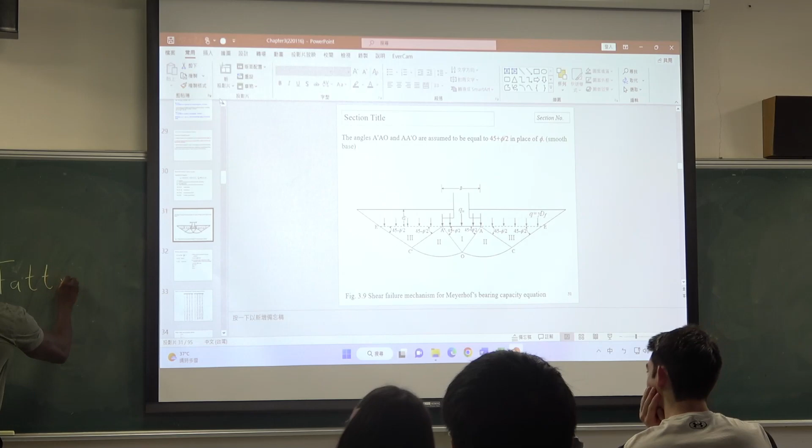And my name is Fatty. Yeah, that's like my family name. My first name is Bamba, but my family name is Fatty. Everyone calls me Fatty, so it's fine. Some people will think it's disrespectful, but it's totally fine where I'm from.

And I'm from the Gambia. I'm not sure if anyone here knows where Gambia is. Probably. Anyone? Yes, oh yeah? Well, smart, because it's a very, very tiny country, so not a lot of people know about it. It's like less than 2 million people, and it's super far away from Taiwan.

Okay, so last week the professor told me you guys are doing the shallow foundations, but you've already started, right? Doing shallow foundations with the professor. Do you remember where you stopped? I think you already finished Terzaghi's bearing capacity part.

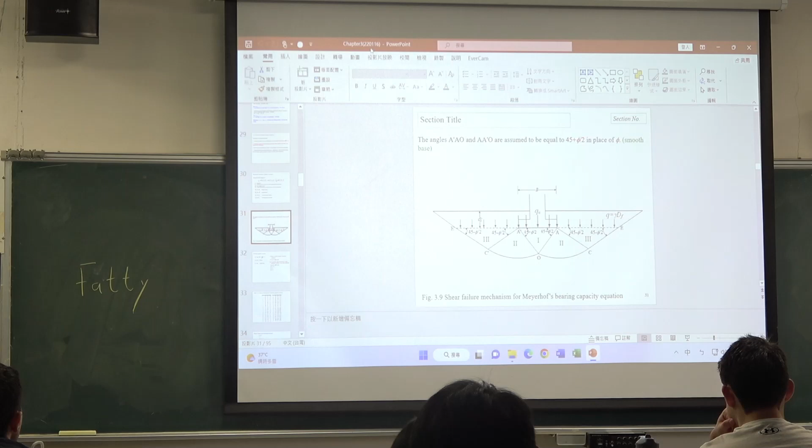Okay, great. So hopefully today we can just move on to the next part, which is Meyerhof's bearing capacity equations. But how about the previous ones, like the introduction for shallow foundations and the Terzaghi equations? Do you have any questions about those, or so far it's all good? All good, right? Okay, great.

Do they have any homework on this? Oh, there's no homework. Oh, you'll get them homework.

Okay, great. So before I go, I think I can ask a very quick question, which is, while learning about shallow foundations, does any of you think about why it's important for us to have foundations for our buildings? Maybe we can just put the building on the ground without any foundation. But why do we need foundations? Anyone think about that?

Any idea? Yeah? So the soil can't bear the load - if you just put it on top, we don't really spread the loads enough in the soil. Exactly, so it's all about the bearing capacity, right?

And also the settlement. If you put the structure directly on the soil, when the structure gets into direct contact with the soil, it probably doesn't have enough strength to support the structure. So that's why usually we make the base of the foundation wider. The reason we make it wider is to make sure the loading is distributed in such a way that the soil underneath can actually handle the loading of the structure.

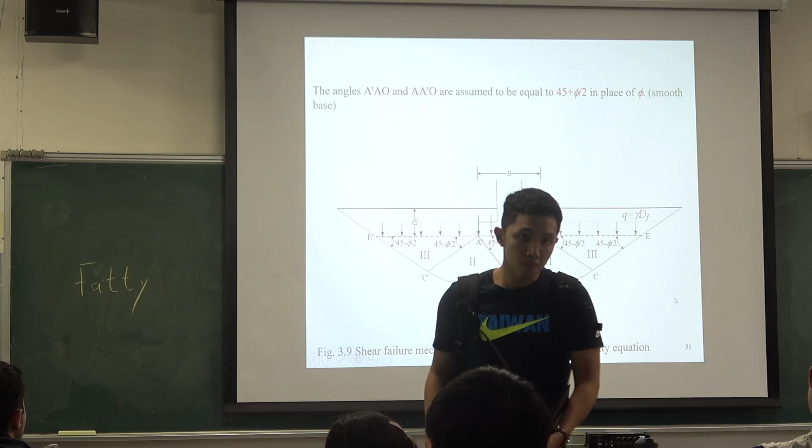So most of the time when we're doing foundation design, typically we consider two things: the settlement and also the bearing capacity. Those are two of the most important things we consider. To a further extent, you may consider things like eccentricity, but bearing capacity and settlement are the most important factors.

Since we're dealing with shallow foundations, we're typically going to deal with ultimate bearing capacity, settlement, eccentricity, and maybe - I'm not sure if you'll do it in this class - how to actually design a foundation, like how to design a strip footing. When we talk about other types of foundations, for example deep foundations, that's a lot more complicated.

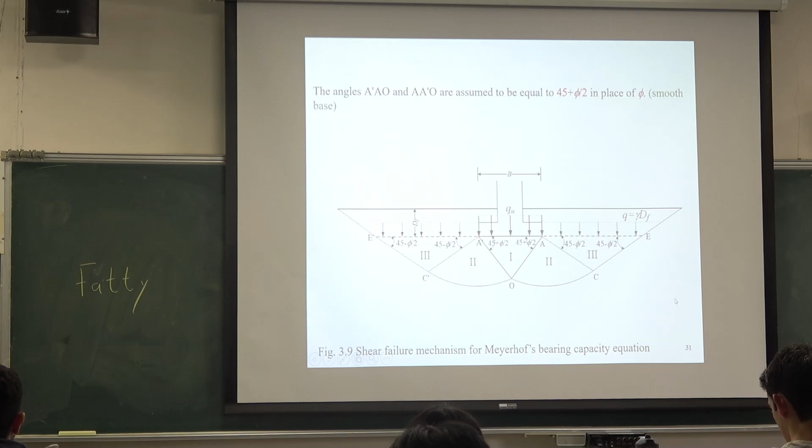I remember in my undergraduate studies, we did not do that one, we only did shallow foundation. I'm not sure if this class will teach you how to do deep foundations, probably not, because you can't even do the calculations by hand. It's pretty complicated.

Okay, so since you already talked about Terzaghi's bearing capacity problems, today we'll go to Meyerhof's bearing capacity equation. And here we can see we have the three failure zones, right?

Like the one right underneath the foundation, the failure zone right underneath the foundation - but remember, that's the rigid zone, the immediate zone. And then you have zone 2, which is the radial shear zone, and zone 3, which moves up, the continuous shear zone.

Okay, so this foundation has a well-defined failure surface. And here it says the angle from A to A. Oh okay, this angle here, right? And the angle AA, well here too, right?

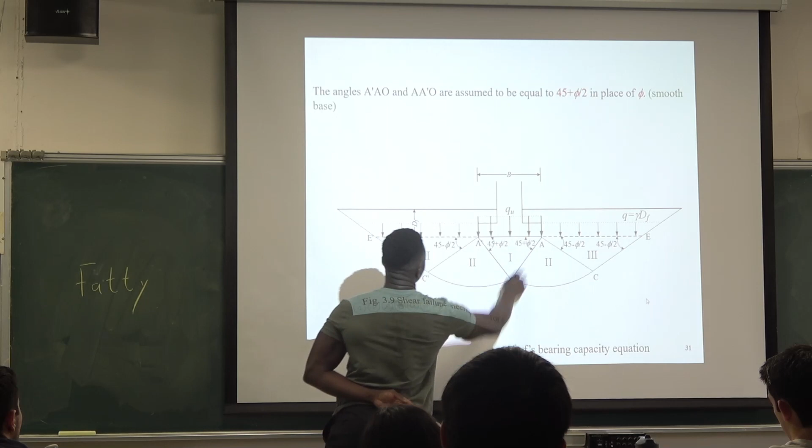They are all assumed to be 45 plus phi over 2. And the phi over 2 - the phi here should be the frictional angle, right? Is it? Yeah, that's the frictional angle.

Okay, and then I think for the most part the equations are actually quite similar. It's just that the factors you take into consideration are quite different.

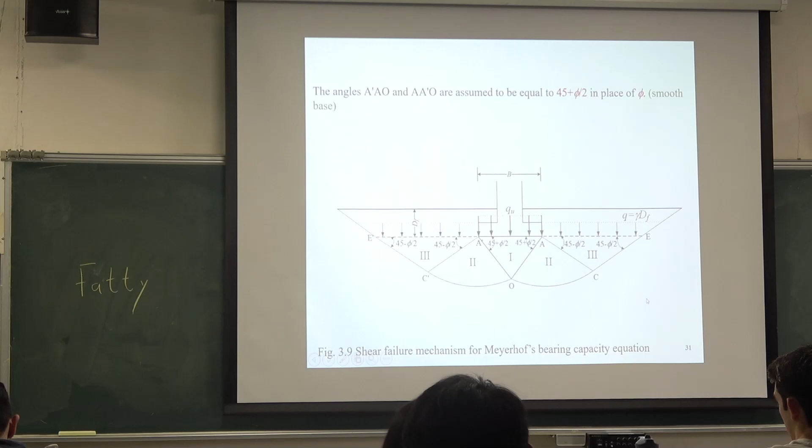This problem is actually going to use Meyerhof's bearing capacity equation to solve it, and it's an effective analysis. When we talk about the effective analysis, for the most part we are talking about the long-term condition of the foundation. For example, when it's short-term, probably you will not need the effective analysis because you still have the water. But long-term condition, the soil will get drained due to the loading on the foundation, on the soil. So you'll have the effective stress analysis.

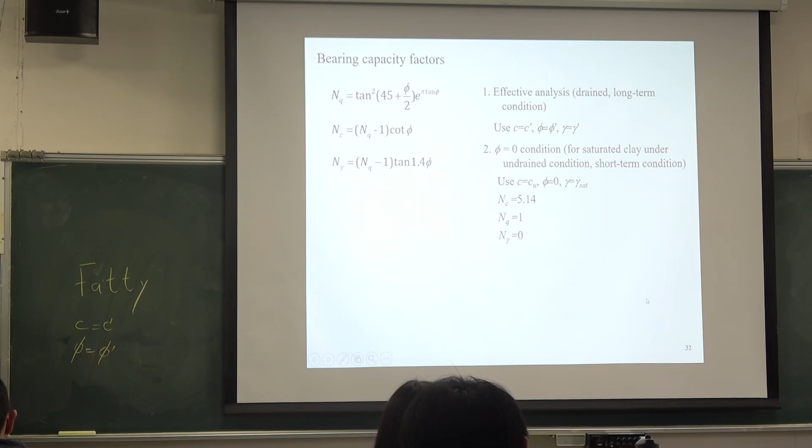But in that case, you'll see the C is equal to C prime, so you have a value for this, C prime. And then the gamma you should use should also be prime - you should use the effective one. Because with time, these values will change. If you only consider the present condition, and then over time if this value changes, then probably the soil underneath may not be able to support the foundation anymore. So that's why it's important to consider the long-term condition of the foundation. And the gamma, the unit weight, also can be gamma prime due to the changes that take place over time.

The second condition is the phi equal to 0, the frictional angle is 0. In this case, we are talking about saturated clay in an undrained condition, so it's like a short-term problem. I don't know if the professor gave you an example. For example, sometimes when you're trying to find the frictional angle of sand, they will give you a very simple experiment - they give you sand and you pour on this table, and it may look something like this, like a little lump.

But then if you're looking at the second condition, for example, the clay is saturated and you try to pour on this table, do you think you can have something like this? It's just going to be like this, right? So for the most part, that's why the frictional angle for saturated clays, we just say take it to be 0 - phi equal to 0.

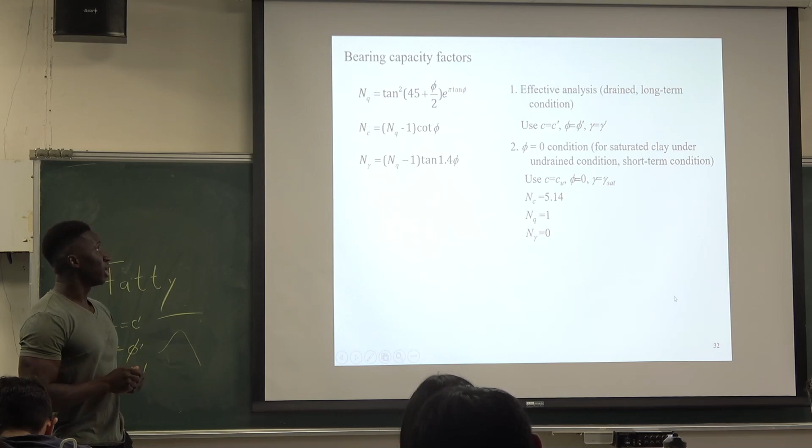So when you're using Meyerhof's bearing capacity equation, 2 things need to come to mind first. You need to know: am I doing the effective stress analysis, or am I doing the undrained or short-term condition? Those 2 conditions are very important because otherwise you can use the wrong formulation. If you don't know whether you're dealing with one or the other, then the whole procedure, whatever you do next, is probably wrong, not right. So the first thing that needs to be clear to you is understanding what the effective stress analysis is - that's the long-term condition. And what is the undrained analysis, or the short-term condition? Those are the 2 most important things. Once you figure those out, you can proceed to better understand the formulations.

So for the effective stress analysis, that's the long-term condition, and the undrained condition is, for example, the short-term. Do you have any questions about that? Any problems?

I have a question - how do you know what to choose in a real life, real case scenario? That's a good question. For some problems, for the most part, they will do both analyses to see. But in some cases, it would be a lot more ideal if you can use the long-term condition. But if you want to be on the safe side, how about you do both, and make sure that the foundation you are building is actually suitable in the short term and also the long term. But for example, if you are going to have a quiz or an examination, the teacher will probably specify long term or short term, and you will go on from there.

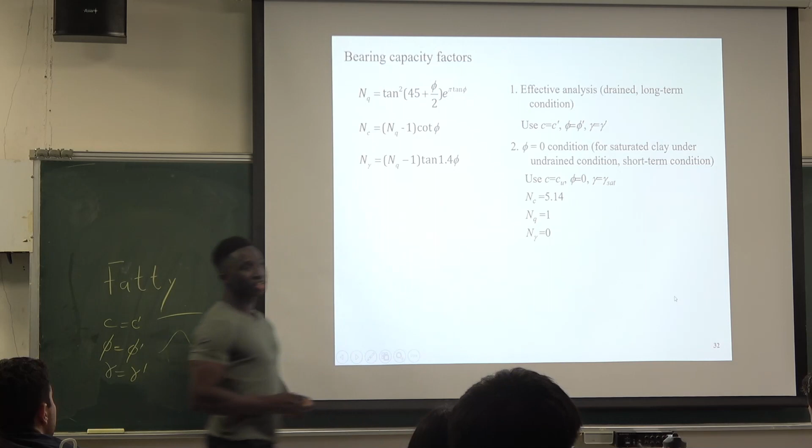Okay, and it also gives us these values, right? So the C will be Cu, that is the cohesion undrained, and gamma now is gamma saturated, instead of gamma prime for the long-term condition.

It's now gamma saturated, that's the weight of the soil plus when it's having water. And you can now see that here you don't have these factors given, but here you already have them listed out for you. There's a very simple reason why: in the undrained condition, these factors are all exactly set values. By looking at here, can you make an assumption why these values are already given to you?

The friction angle is 0. So in this case, no matter what, your frictional angle is 0, right? So if the frictional angle is 0, that means by looking at our table, these values are exactly going to be this. But in this case, the frictional angle changes, it's different for different conditions. So you have to look at the table to be sure what are the values for, let's say, N gamma, NQ, and NC.

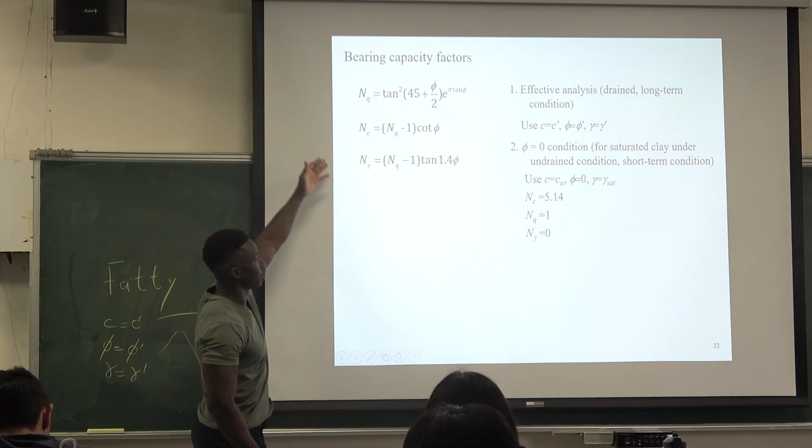So basically here those are the two most important things, and then you can see the equations already given here. So probably in the exam they ask you to calculate the short-term condition, you just be like, thank God, because you don't need to waste time doing the calculation for this.

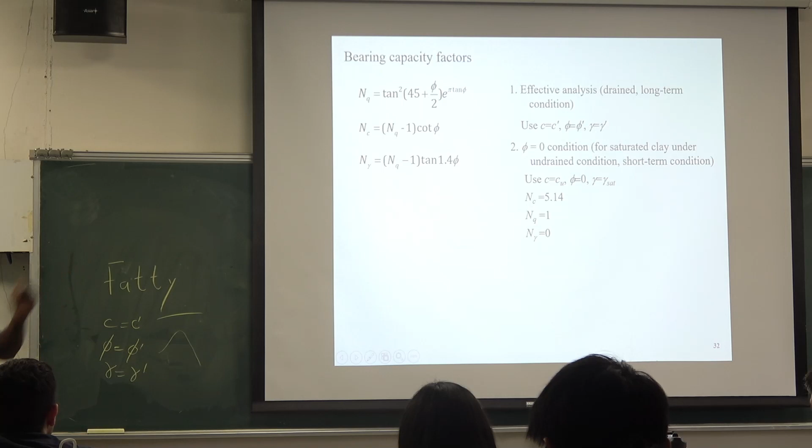And if you are lucky enough, sometimes probably the professor or the TA might just give you a table at the back, so you can just look at the table instead of doing the calculations. I think the reason why sometimes they give you the equations is to make sure that you understand how the values come about. But actually in practice, the engineers probably wouldn't want to waste their time doing this as well. They also just refer back to the table and make sure it is done as quickly as possible.

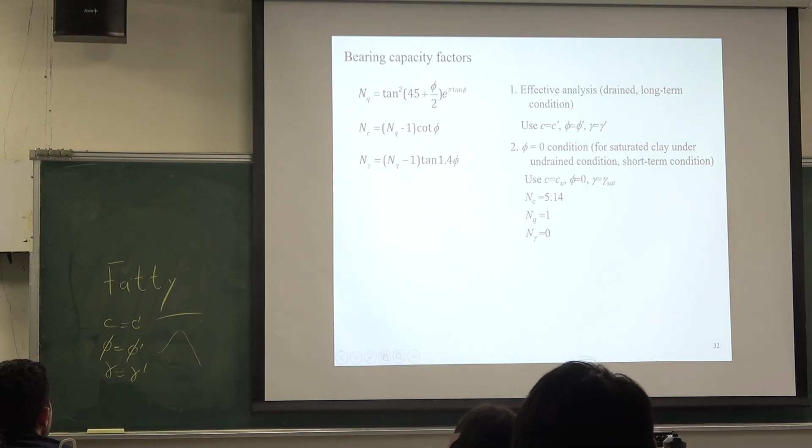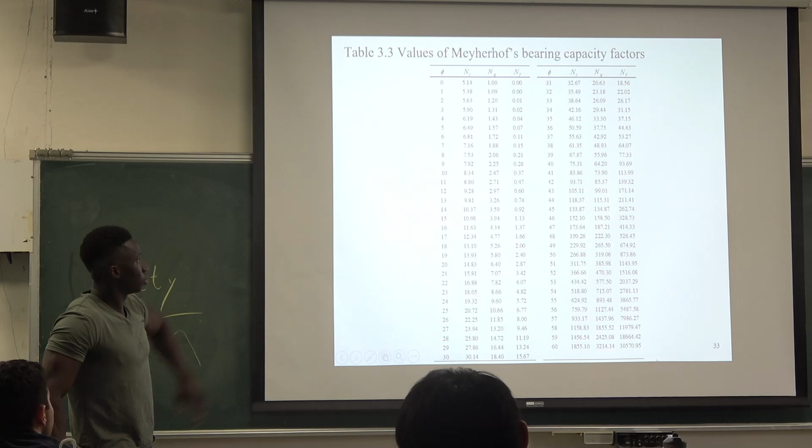Okay, so for the effective analysis and the undrained condition, you can see the values here. So it gives the values for the Meyerhof's bearing capacity factors. You can see why when phi equal to 0, the values are exact. And then they gave them up to phi equal to 60, that's a very strong soil.

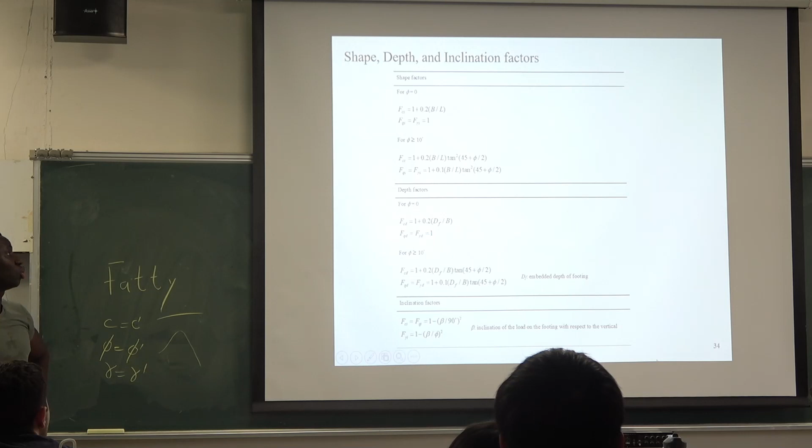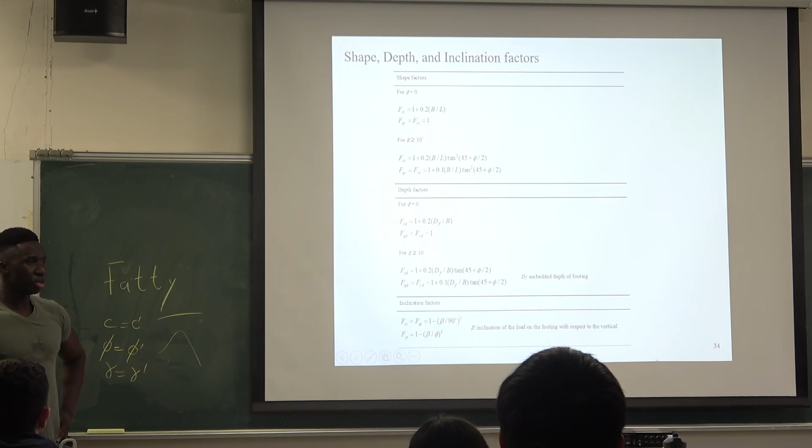And then next you go to the depth factors. This one depends on how deep the foundation is. So if, for example, this is 0, then this is the equation you will use. And here, I think you're all very familiar with that term already, the df should be the depth of the foundation, and then you have these two values which are equal to 1.

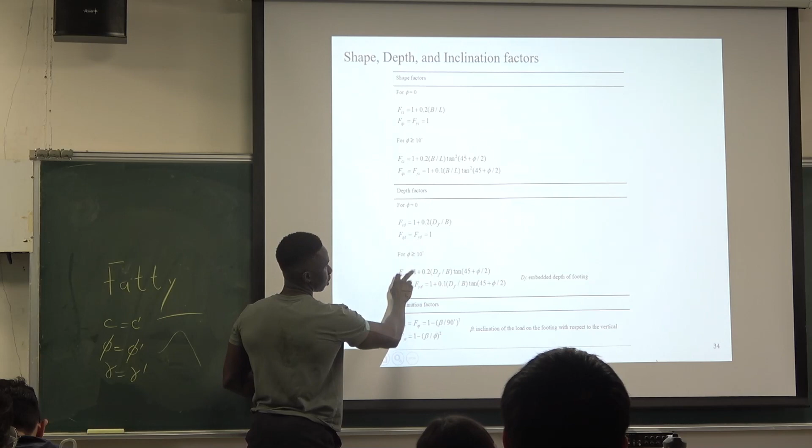But similarly, if this value is greater than 10, then now you have the equation like this. It changes with phi.

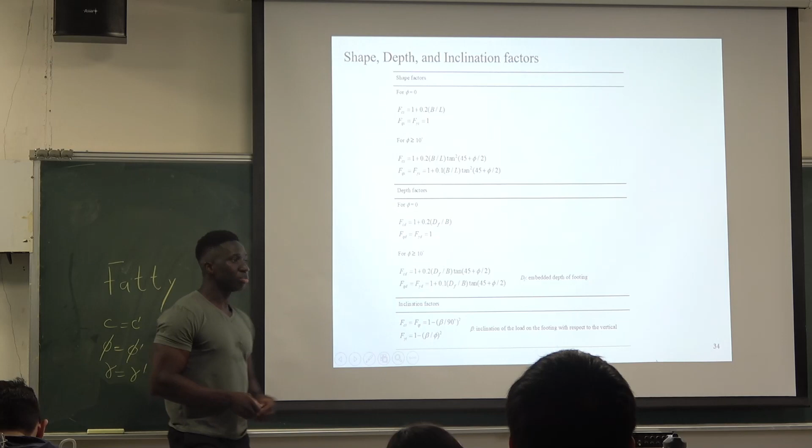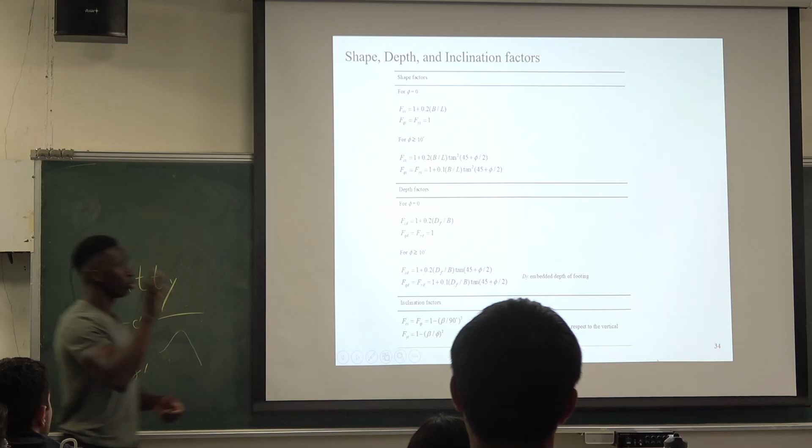Okay, and finally you also have the inclination factors. So sometimes maybe when you design the foundation, the loading is not actually coming straight through the middle of the foundation, sometimes it's probably inclined. So you may also want to calculate the inclination factors, the foundation itself is probably inclined. So these are also the equations that you will need for the inclination factors. And then you will realize that later on we will typically use all these values when we want to calculate the ultimate bearing capacity.

Okay, so here we have an example. It says a rectangular footing is 2 by 4 in plan, situated on dry sand with an embedded depth of 1 meter. So the depth of embedment is 1 meter. The frictional angle of sand is 32, and the unit weight of sand is 18.

Okay, so if we have a problem like this and we want to solve it, what's the first thing we need to think? We already get all the parameters, right? But before you go on, what do you need to know? What's the first thing? Is it short term or is it long term? Or is it going to be an undrained analysis or a drained analysis?

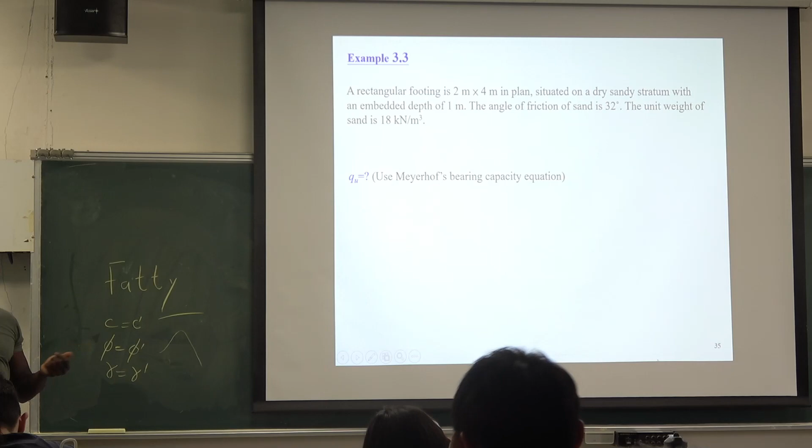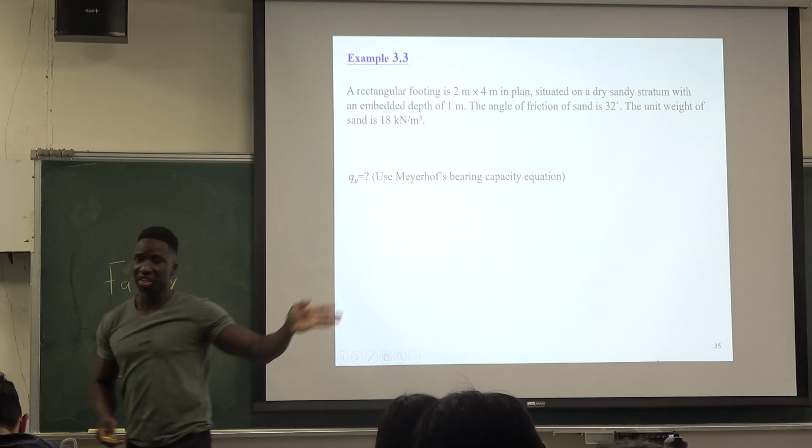Do you think we need to do an undrained analysis for this? No, right? Because it's already dry sand. Okay, so it's pointless. It's already dry sand. So here, they are not telling you directly to do an effective stress analysis, but they are indirectly telling you to do an effective stress analysis by telling you it is dry sand. So if you look at this, you know, okay, I don't need to worry about the undrained analysis. It is dry sand. Directly, you have only one problem, that is to do the effective stress analysis.

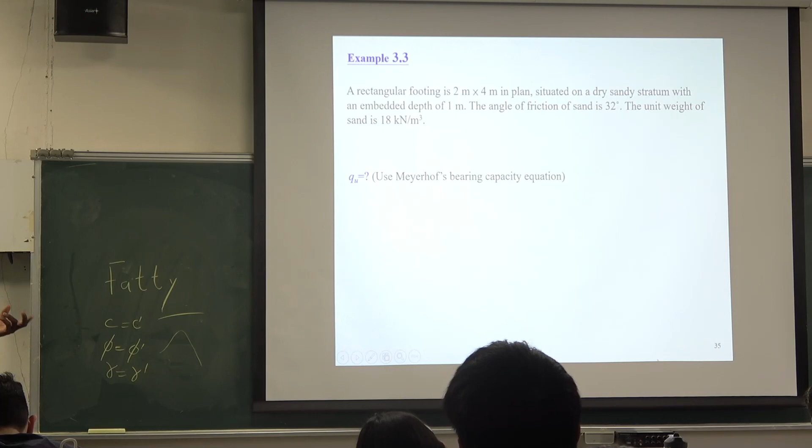Okay, so we already have this very, very long equation that I hated to see when I was a student. And I hope in the exams you guys will be given these equations, right?

It's gonna be, yeah, but probably like this equation, you don't have to, I believe you don't have to remember, right? It's too long.

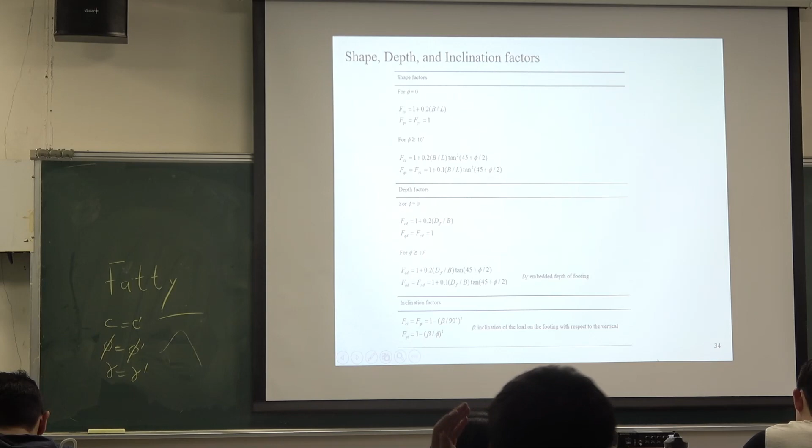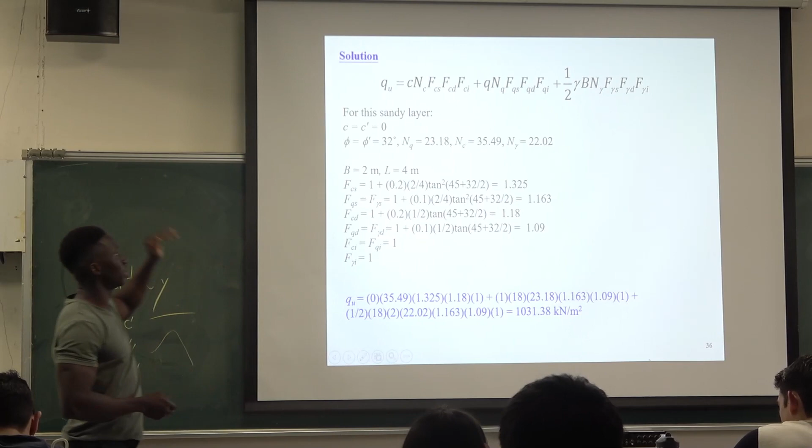Okay, so you can see here, you have all the various factors like Cs, Cd, Ci, the inclination, the shape, the depth factor, and then also the shape, the depth, the inclination factor, and then also for gamma, for Q, the loading, and whatever, they're all given here, right? And then now, you have to find each of these individual factors for you to be able to find your Qu.

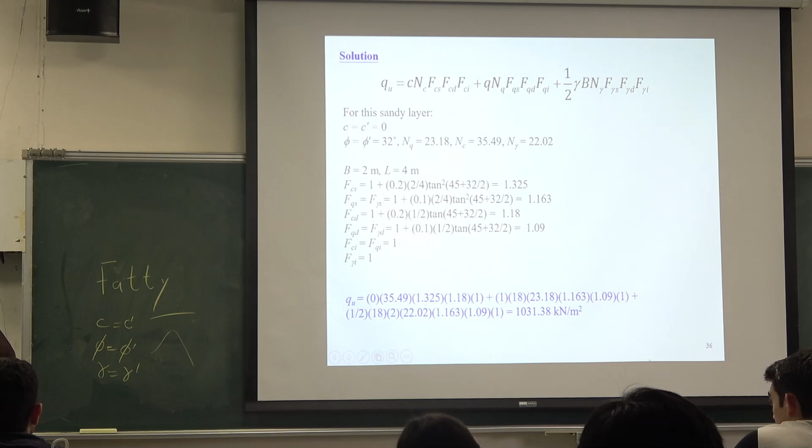And then it says, for this sandy layer, C equal to C prime. Okay, so in some cases, for example, if the sand is not dry, C is not necessarily equal to C prime.

It's not, right? But in the dry condition, our C can be equal to C prime. Because when we think about it, when we say the drained condition, it means the water is leaving the soil and then the characteristics of the soil are changing, right? The gamma changing, the C prime changing. But if it is already dry, then there's no water leaving. So C can be equal to C prime.

So when we are working with this problem, C is equal to C prime and then whatever. And then in this case, it's equal to 0. For dry sand, the cohesion is equal to 0. So that's also something that you need to try to remember.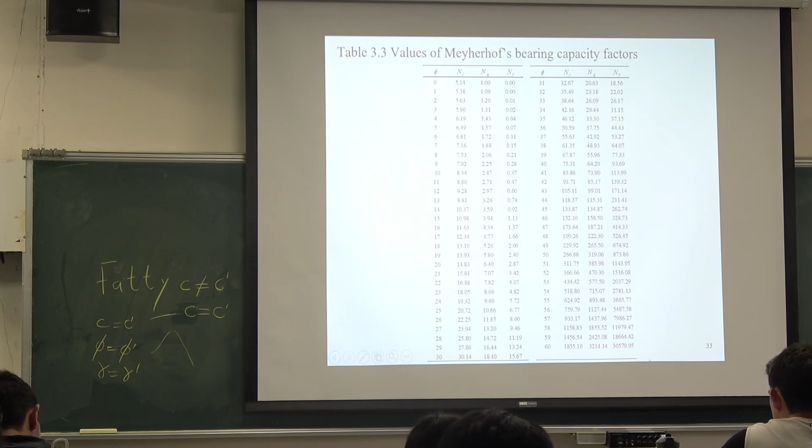Okay, and then by looking at the question, we know that the frictional angle, or the angle of friction, is 32. So we can use that 32 and go back to this table, okay? When we have 32, Nc, Nq, and N gamma values are already given, so you list down those values here, right?

And then you get the width of the foundation and the length, 2 and 4, and then you can just directly substitute them in the equation above.

Okay, so first and foremost, we want to calculate this, right? The FCS value, the FQS value, and then this and this and this. So if you are going to calculate these values, then you need to come back to where? Come back to this table, right?

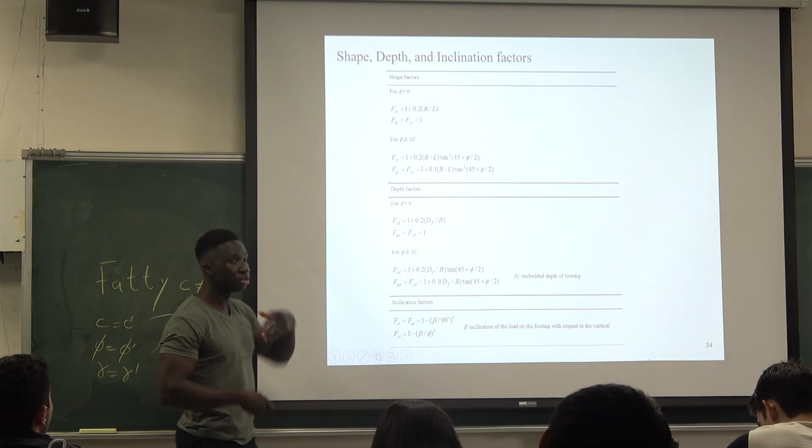And then for here, we are going to use down here, right? Because the frictional angle is 32. Instead of using what is up, we are going to use here. And then the same thing here. Okay? And then this one for the inclination factor is already also the same. So in this problem, you may be wondering why do we use here, here, and not the ones up. But then if you look at the frictional angle, you can tell it's okay, simply because the frictional angle is greater than 10.

Okay, so once you have all these values, I think the problem is not that it is complicated. The problem is that it's quite long and there are a lot of minor calculations where you can easily make mistakes.

So once you get all these factors, all these values, the only thing you need to do is substitute them in here and then use your calculator to do the calculation.

You can also save yourself the trouble. For example, maybe the factors like FCS, FCD, FCI, you probably don't need to calculate them anymore if you already know that this value is already 0. You can save yourself some time, because at the end of the day, if you put them back there, it's still going to be 0. They are not essential, and I don't think any professor or TA will have a problem with that. You can just start it off, say it's 0, and leave it at that.

Okay, and then we have the gamma for the foundation, and then we just substitute all the other values, and then that's the final answer. I think this equation is quite straightforward and easy to understand. Does anyone have any question?

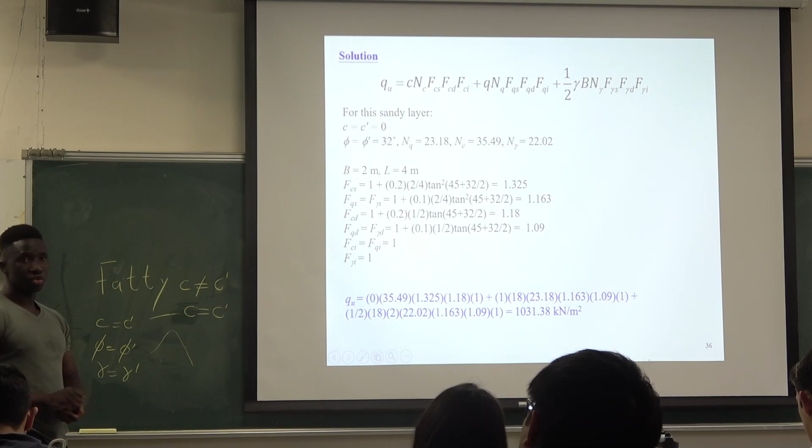What happens if the friction angle is between 0 and 10? I remember in most cases when it is between 0 and 10, we'll just use the one above, for frictional angle greater than or equal to 10. But for the most part, it's either 0 or greater than 10. It's very rare to see the frictional angle less than 10.

I just wanted to mention, so every time it specifies that it's in dry conditions, we can assume that cohesion is 0? Yeah, for the dry sandy condition, you can just say it's 0. That's one.

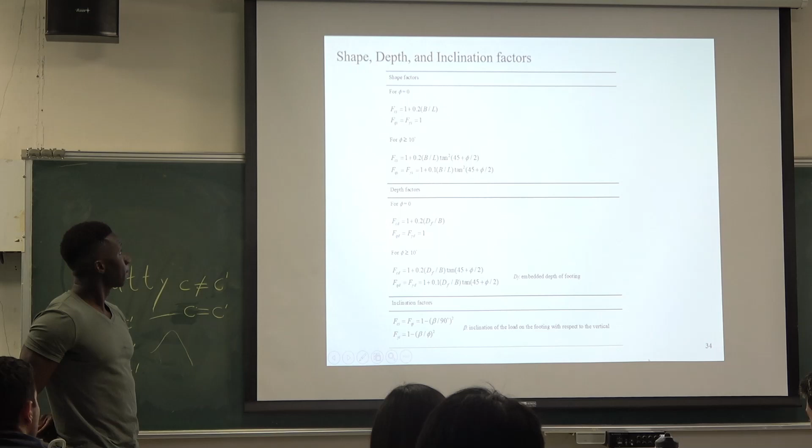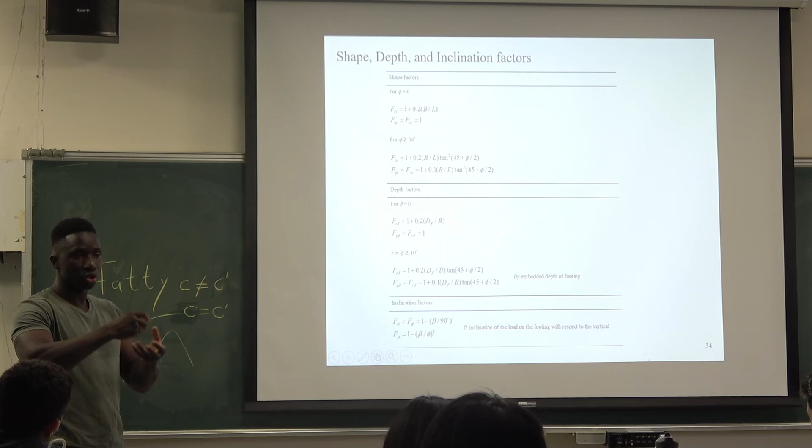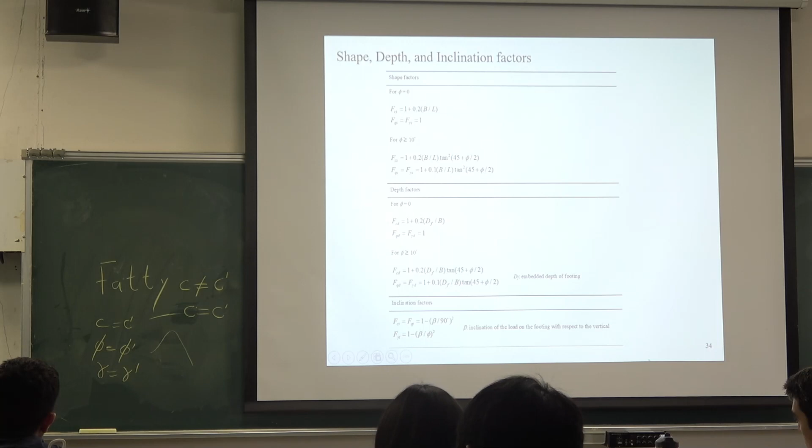Because if the sand is already very dry, you can tell there's no sort of interconnection or bonding between the particles. They are just separate particles. For example, you can just pick them up and you can see when they are going down, they are just separate individual particles. So there's no sort of cohesion or interlocking between the particles, that's why the cohesion is 0 in that case.

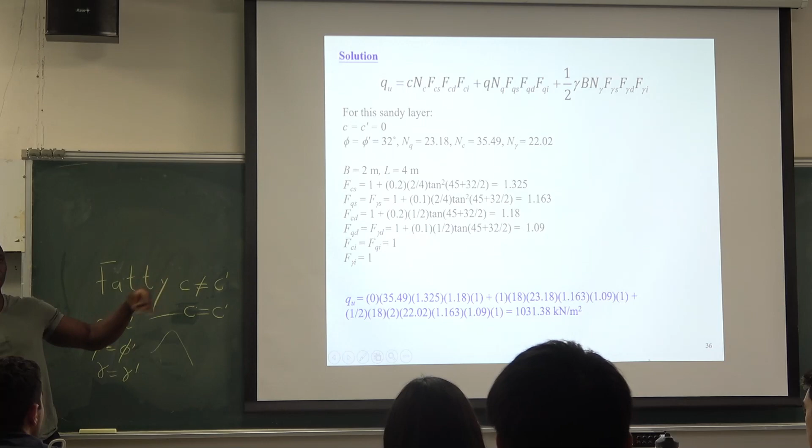Any more questions here? I think sometimes by looking at it, it can seem very simple, but for you to feel comfortable with it, you probably need to at least practice 1 or 2 questions using each of these conditions, for example, the effective stress analysis and the undrained short-term analysis. Then you can find out what is it that you don't understand, and go back and familiarize yourself with those points.

By looking at this, it can actually seem very easy, and then you probably never practice it, and then on the day of the exam or whatever, when you try to do it, you realize it's actually not that easy. You can easily make mistakes. So please try to go over it and solve this problem, or if you can get any other book, try to solve 1 or 2 problems for each of the problems, and it will give you a much better understanding of this type of problems.

Okay, if there is no question, we can probably move on to the next one. I think that probably will be the ongoing condition.

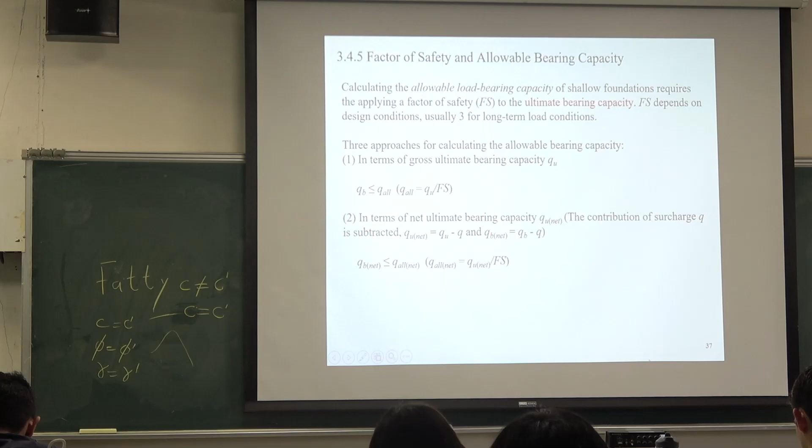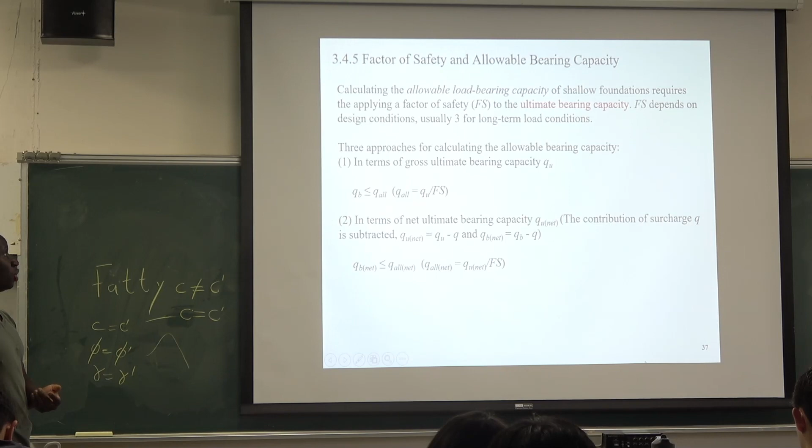Okay, so the next one we're going to calculate the allowable load bearing capacity of a shallow foundation. We want to make sure that the loading from the foundation is acceptable, that the soil can actually sustain it. For the most part, when doing that, you need to apply a factor of safety to the ultimate bearing capacity.

The factor of safety depends on the design conditions. For long-term conditions, usually the factor of safety should at least be equal to 3. If you want to make it bigger, you can, but it depends on if your boss is willing to spend that much money. Maybe the luckiest you can get in long-term conditions is 3.1, 3.2. If you probably want to make it 5, maybe the next day you don't have a job.

There are 3 approaches for calculating the allowable bearing capacity. In terms of the gross ultimate bearing capacity, QU, which is the ultimate bearing capacity, the total loading you want to allow on the foundation, divided by the factor of safety is equal to the Q allowable.

I think this is quite reasonable. It's like if this is the maximum amount of load that this foundation can take, but you want to make sure that whatever load you are going to put on it is at least 3 times less than this, then you just divide this by that value, the factor of safety, for example 3, and then you get the Q allowable.

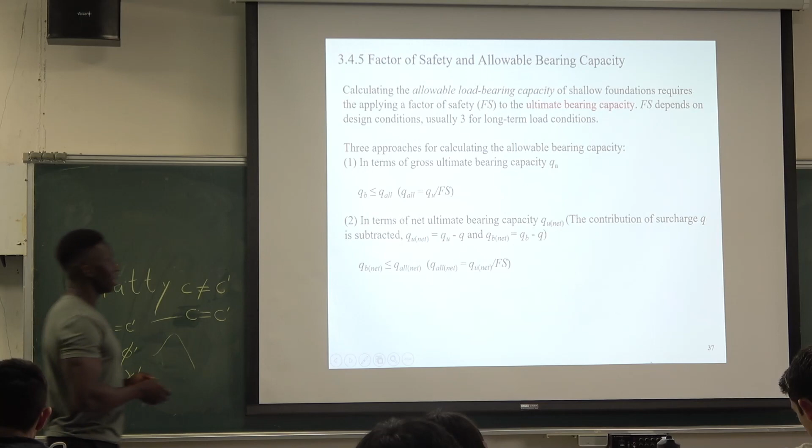Your Q net is the allowable ultimate bearing capacity, so you can just use that, considering the contribution of the loading from underneath the foundation due to the soil. But in some cases, people think it will make my foundation more stable if I don't consider it, so they'll only use the gross value. In some cases, they will try to subtract the soil surcharge loading. It's still the same thing though - you can see that the allowable in all these cases is the ultimate divided by whatever factor of safety value you want to have.

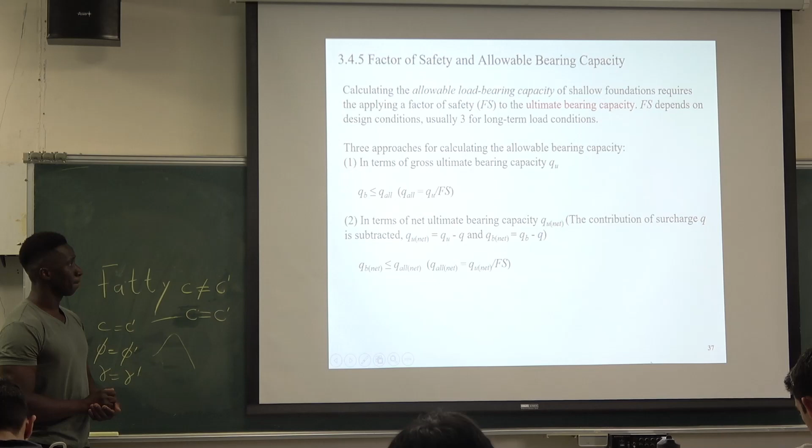Do we have any questions about these two formulations here? All good, right? Okay, great.

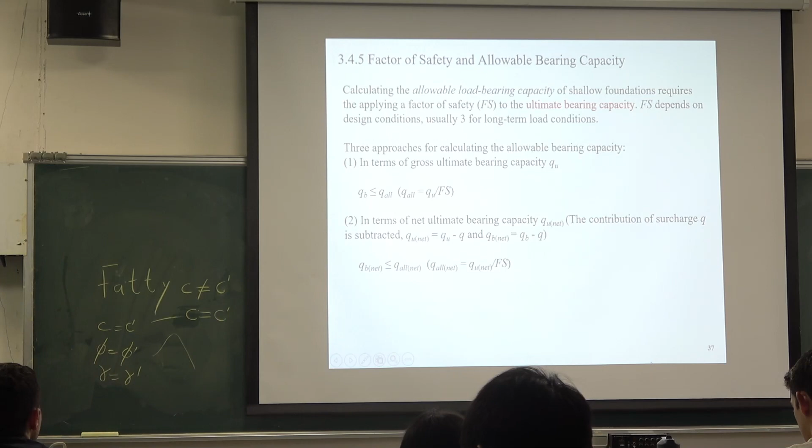Okay, so if time allows, I'll quickly go through this and then try to do something similar like we did previously. It says a rectangular footing is 2 by 4 in plan, situated on dry sand. Seems like it's the same problem. Use the Meyerhof bearing capacity equation.

So first we need to calculate this QU net, that's the allowable ultimate, the net bearing capacity. In terms of net ultimate bearing capacity, given that the footing is subjected to a total centric load of 3200 on its base, we also need to calculate the factor of safety of this foundation.

So according to example 3.3, the QU is this. Like the example we did earlier, the QU value we already got, right? That is 1,031 kilonewton per meter squared. So you just put that back here, instead of redoing the whole equation, we just put that back here.

Next, you calculate the surcharge loading. This is the equation you use: gamma multiplied by the depth of the foundation, df. For example here, we know the depth of the foundation is 1, and the gamma, the unit weight, is 18. So we can easily get this value, the surcharge loading.

Okay, and once we have that, we just divide this QU net by the Q bearing capacity. So this part is just repeating here.

Okay, so I think everyone is also okay with how this one comes about, right? Any more questions on this part?

Okay, so once you get that, you get the QU net and the Q bearing capacity net, then you can just go on to estimate or evaluate the factor of safety for this type of problems.

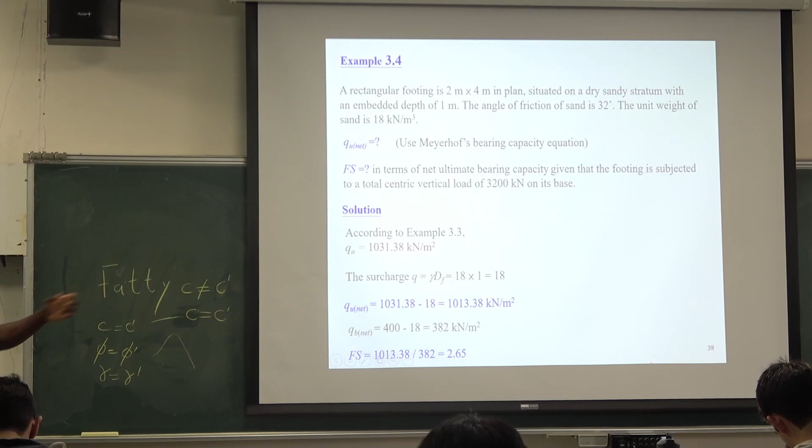For most cases, in this type of problem they will give you the vertical loading, vertical centric loading on the foundation, then ask you to calculate the factor of safety. Or in some cases, you may be given the factor of safety and asked to calculate the loading on the foundation. Another important thing here is the centric loading, meaning the loading is through the center of the foundation. If it is not the case, the calculation becomes more complicated, and you have to consider eccentricity.

Okay, we can see that so far, all what we have done today, most of the problems deal with dry sand, or something like that, most of them. But in some situations we will have groundwater, and once you have groundwater, you need some modification to the equations we had earlier. The equations become more complicated. In some instances you even have to do the calculation in different places, like above the groundwater and below the groundwater level. So there are different cases and scenarios, like 3 different cases, when we use groundwater situations.

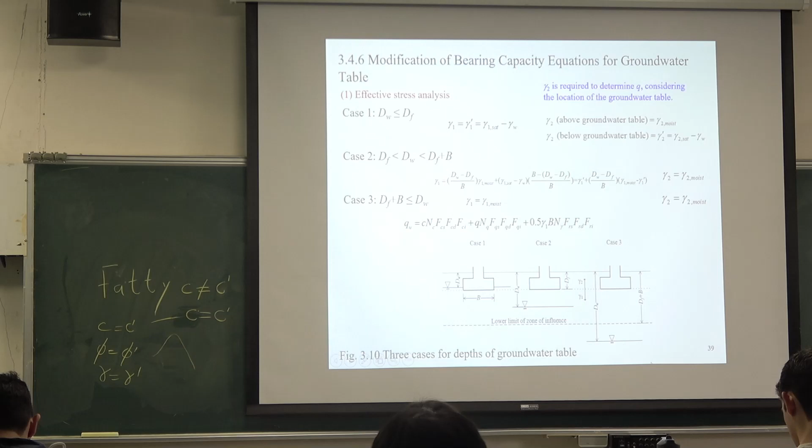I think we probably don't have enough time to discuss the groundwater part thoroughly. It may not be ideal to study right now. So if we possibly have any questions about the earlier parts or anything unclear, we can discuss that. But if not, then the next part, which is groundwater, we can do tomorrow instead.

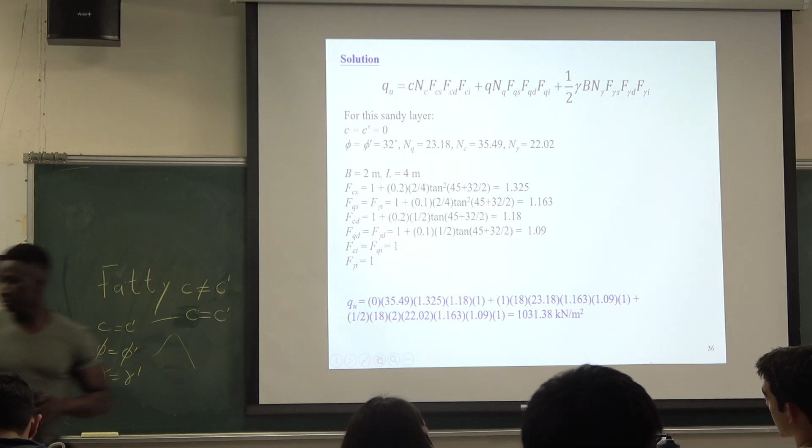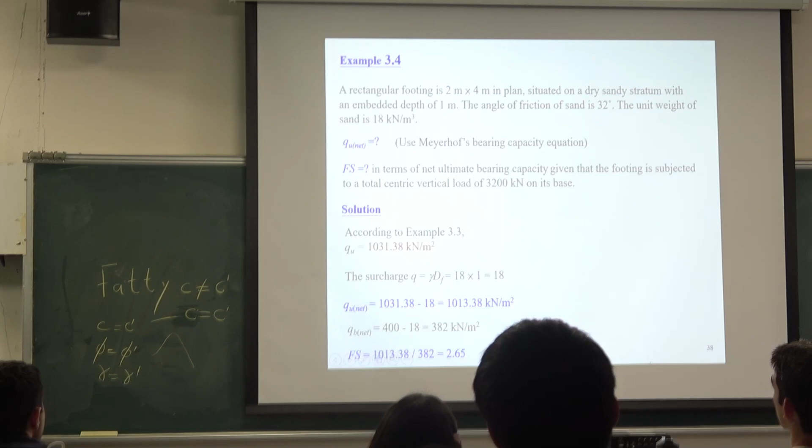Can you go back two slides? Back, now where the factor of safety work is. What is this one? This one, the other one. Is it this one, 37? 37, oh sorry, that one, this one, right?

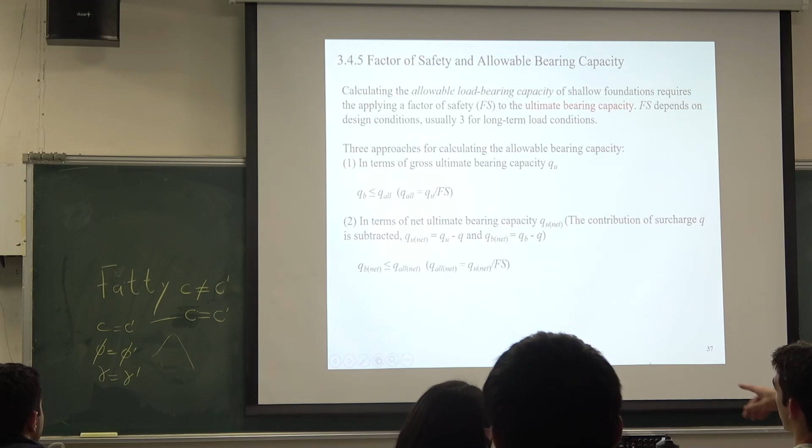Here the QB is the bearing stress. So the Q allowable is the load bearing capacity, and it has to be greater or equal to the bearing stress, right? And that's when it's safe. So Q sub B is the bearing stress, and Q allowable is the bearing capacity. Yes, and QB is the stress, the bearing stress. Yeah, oh I get that, I get it.

Yeah, Q, you mean this one? It's like allowable, right? Yeah. And then this one is the B. Yeah. So for all this, probably the U is just like ultimate, and then ALL is allowable, and then B is bearing.

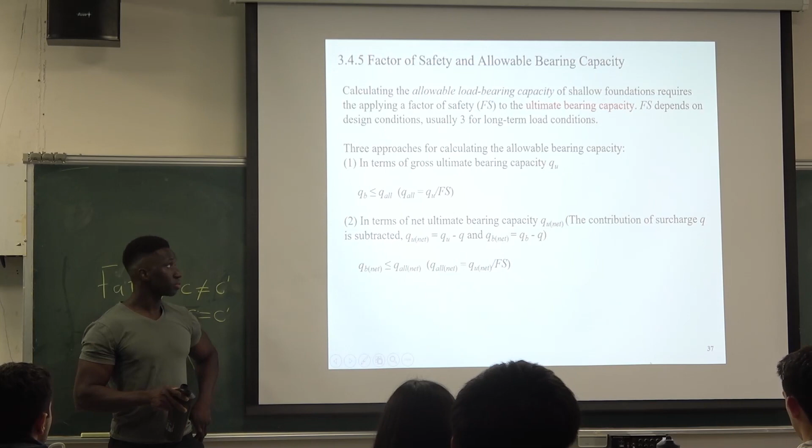So usually when we talk about the ultimate, it's like the maximum it can take, and the allowable is like how much you want it to take. Most of the time, the factor of safety equals the ultimate divided by the allowable. For example, it can take up to 300 kilonewtons, but in your design you only want it to take about 100, because you want to have some factor of safety. So it's like always.